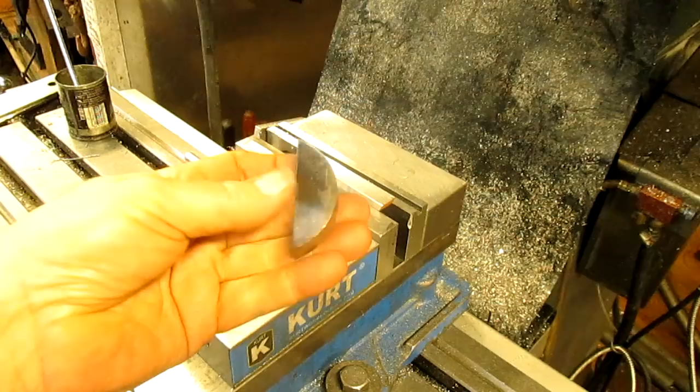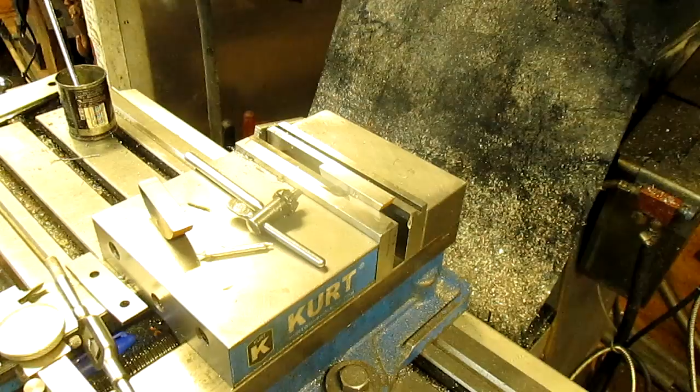So I've cut two, well, kind of Woodruff keys, but we're gonna just mill those off and turn them into something usable. First thing we got to do though is mill them off.

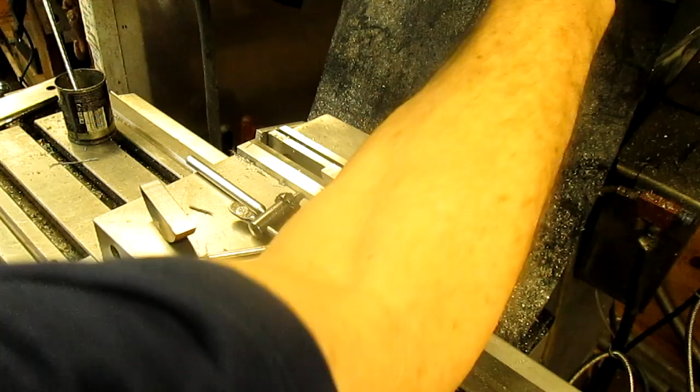So let's put a bit in here, let's bring them down to size. Okay, new battery in the camera, and we are ready to rip. So we're gonna just square off the top edges of these two here, and then go from there.

Alright, there's one. We got one little corner there, but we're going to be cutting that off anyhow.

And what do we want to do? Let's get some smaller parallels.

Alright, now we need to take the burrs off the edges here. Drop this baby in.

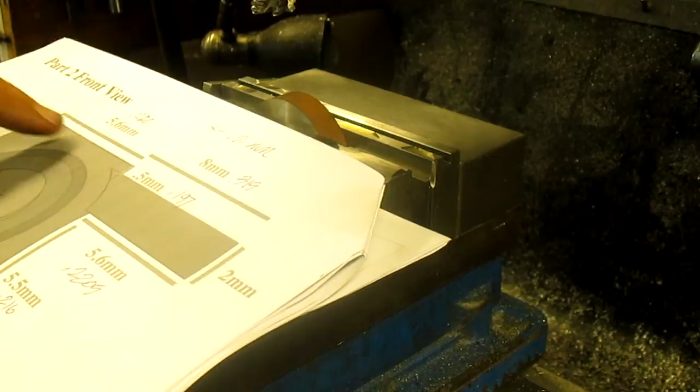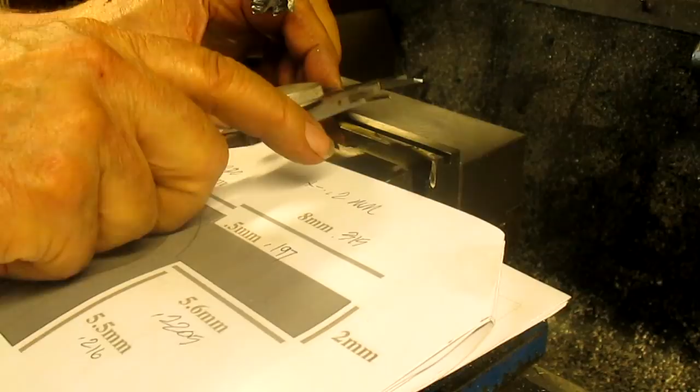Now our width is consistent. This is 550, 220, and 315, which measures out to, what is that, 535, and we are sitting at 540, which gives us enough room to polish back. Okay, so now we need to go to, so there's 540, that goes that way.

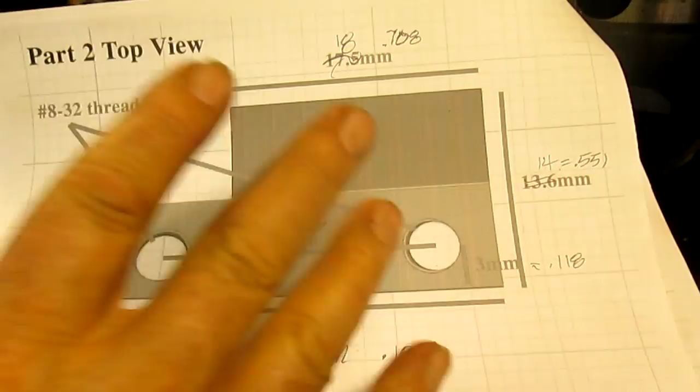Okay, so we're going to go from this very weird, hard to understand drawing, although it's understandable if you take it in steps. We're going to go to this three-dimensional drawing, and I sketched in all of my measurements around this drawing. Not all the measurements, but we'll deal with that later. Right now we're doing the perimeter.

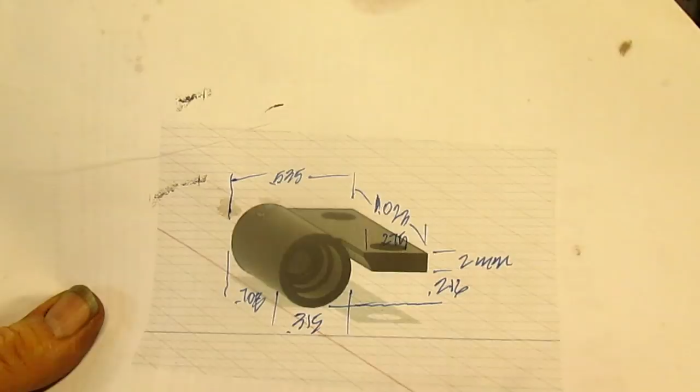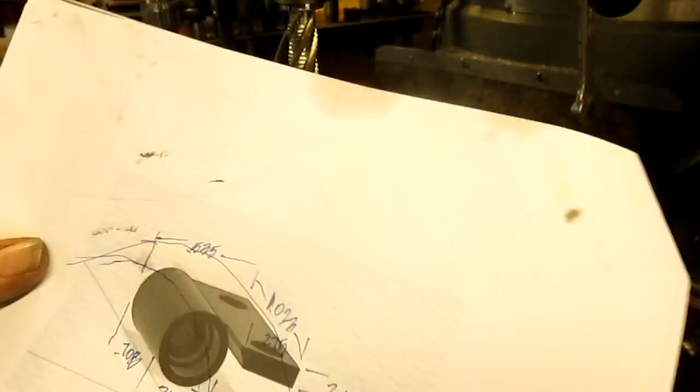Okay, so that's going to be a pretty good start, I think. Let's see what we can do. 535 goes that way. Okay, so my raw piece of material is right there. So this is one dinky ass piece. It's gonna drive me absolutely bonkers.

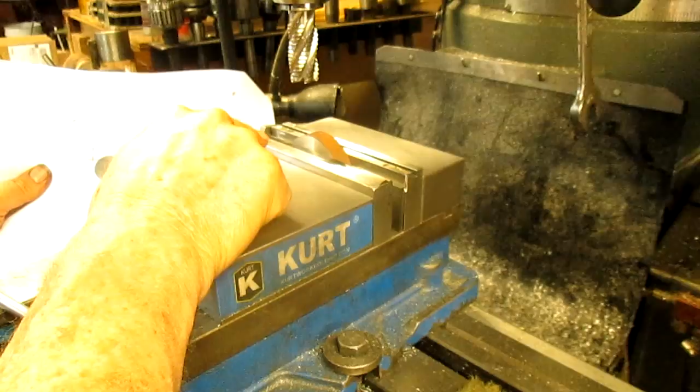So what we need to do is go find 1 inch. We're going for height here. So 216 and 2 millimeters. All right, let's start cutting.

And I think what we can do is just do both of these at the same time. All right, let's see what we got here, at least this first cut.

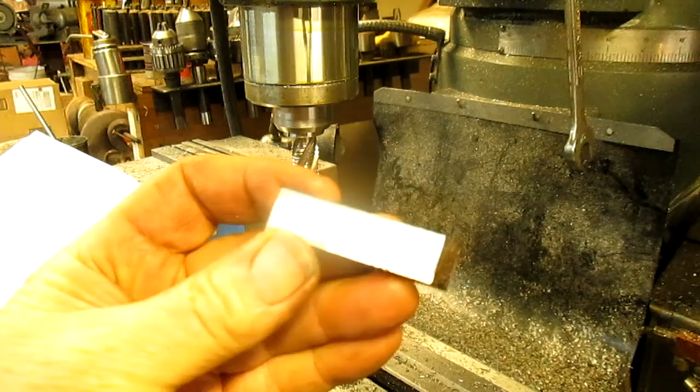Okay, well, we need to get ourselves an inch and 23 thousandths, and that's almost halfway. So what we're going to do is take it over to the saw and saw that off.

Alrighty, and we will. All right, well, we've cut it off, and now we've faced that one side. Now we're going to bring it over to the other side, and take a quick pass.

Okay, and we are at an inch and 57, no, 55, inch and 55. So we want to come to 23, 32 thousandths. So we'll take it in a couple of passes.

Let's do 25 or 6, and then over to 32.

1 inch 22, I like it. And I think what we're gonna do, we do have a bit of leeway on this, so that's not too much of a problem. There's just a couple of measurements that are critical.

We're gonna come in and we're just gonna touch. And there is our zero.

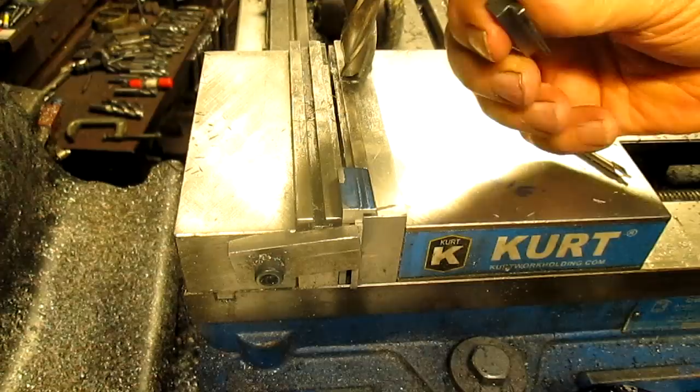Okay, so we've got our basic profile cut. Now we want to drill some holes, and we're supposed to come in 3 millimeters, which is 118 thousandths. So we're gonna strike a line there, and then we come in from the side.

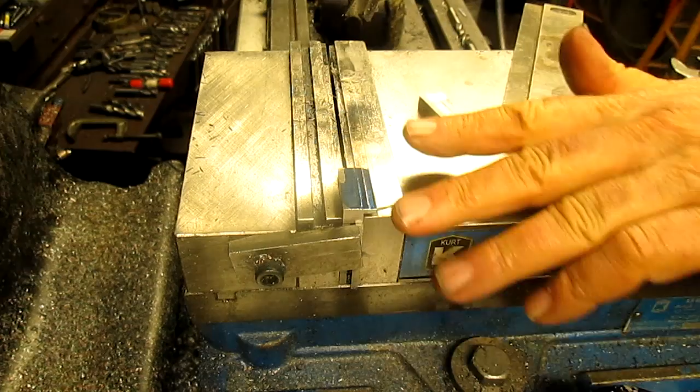Doesn't say. 708 is our width, and that can be anywhere in here because he didn't delineate.

Okay, we got our pointer back in. We're going to take it down till it touches, or not touches, but close. Get my cheater glasses on. Bring it in until we're sitting right above that line, which is right there.

Now we want 708, or 18 millimeters. So let's just kind of fake it right there and put it on millimeters. And what did we say? 18 millimeters.

And we'll kind of drop down and make a mark. Of course, I forgot to mark my... okay. That's 0. Now 18, 18 will take us right out to there.

What's that look like? And it's a little bit long, so we're gonna split that number, and we'll put 0 right there. Come down, make our mark.

Come across for 18 millimeters. What's that look like? That looks pretty good. Let's see what we've got.

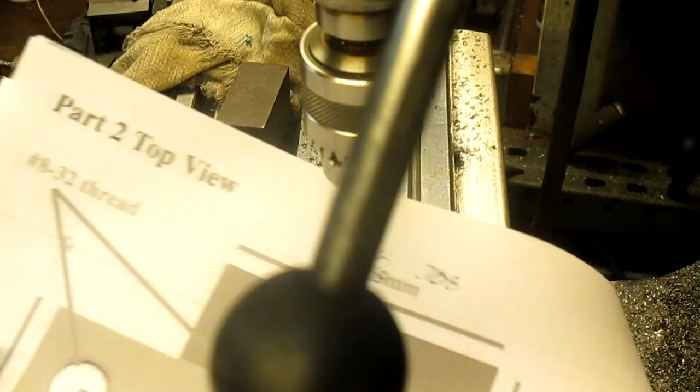And our hole size is, can you see it? There we go. Oh man, this thing's right in the way, isn't it? Let's just take it out.

Okay, so our hole size is 8-32. So we got to get the corresponding drill bit and the tap.

All right. Bring it down, and we're just going to do it by hand. There's hardly any thread there.

All right, there's one. Now we'll put the tap back in. Next step is complete.

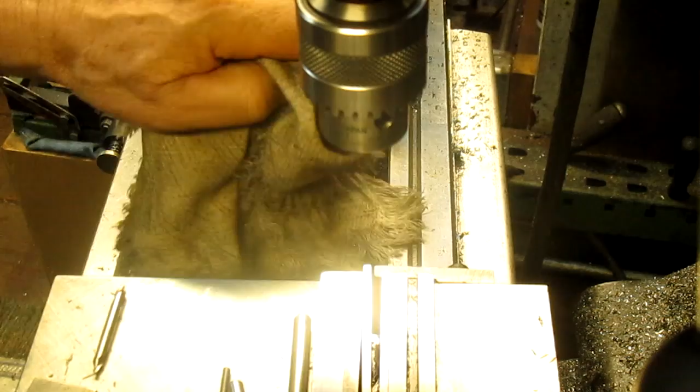All right, let's go ahead and do the next one. It keeps looking like there's something wrong, but I measured it again and it seems to be fine. What's going on there? Oh, we're out beyond the mark.

So we want to, let's take that out, let's put this in. Oop, this way. I don't even think we need this now that I'm looking at it.

Okay. Now, supposedly, we'll repeat this.